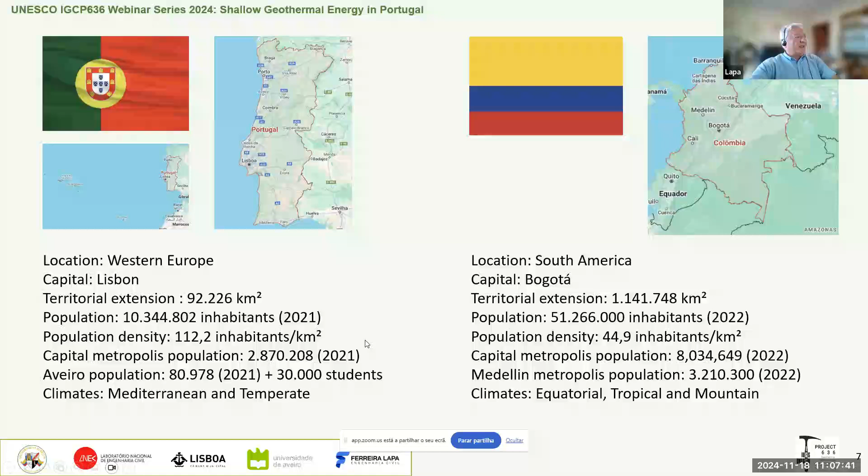So I will make an overview of this technology, which we call shallow geothermal energy systems. I made a collection of information about our two countries, Portugal and Colombia. It's evident that we are different countries, with different climates, different population, and different distribution of population. So the question we can put is whether this technology is useful and usable in different country conditions.

We can make this statement from our experience: despite the multiplicity of social and economic circumstances, different climates, geology, and environment, this technology shows that it can adapt to any of these situations, depending only on its implementation, because of different types of buildings and their energy needs.

This shallow geothermal energy system is so-called very low enthalpy geothermal energy system, because we are in the range of temperatures of the human body, between 0 and 40 degrees Celsius. This technology is for acclimatization of buildings, so air conditioning of individual buildings and also urban complexes, realizing the following guidelines.

The underground, the soil, is a stable and endless source of renewable energy closer to the building. This is important because normally traditional electric power equipment uses energy that is transported from other locations.

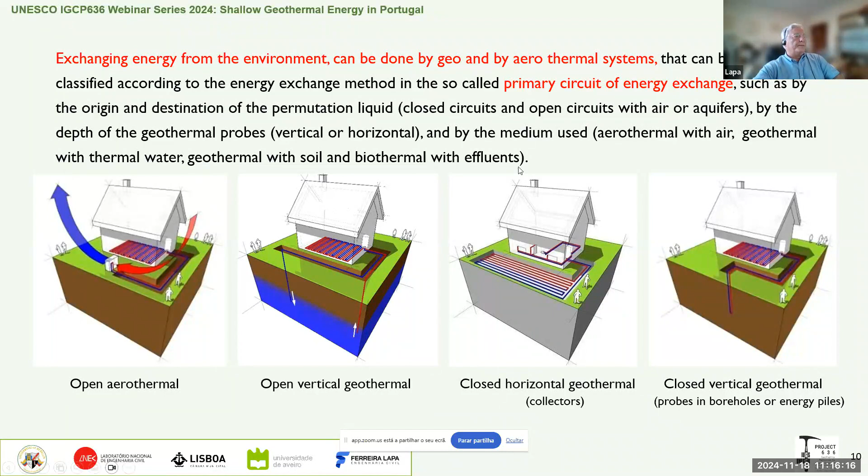So these shallow geothermal systems use the soil as an external exchange medium, but we can use other means to transmit the soil temperature or the water in the soil, in an open loop, or using sewer, for instance. We can transmit this to the inside of the building, and if we have needs of cooling and heating, we can use reversible heat pumps that can transmit not only heat but also cold energy to the interior of buildings.

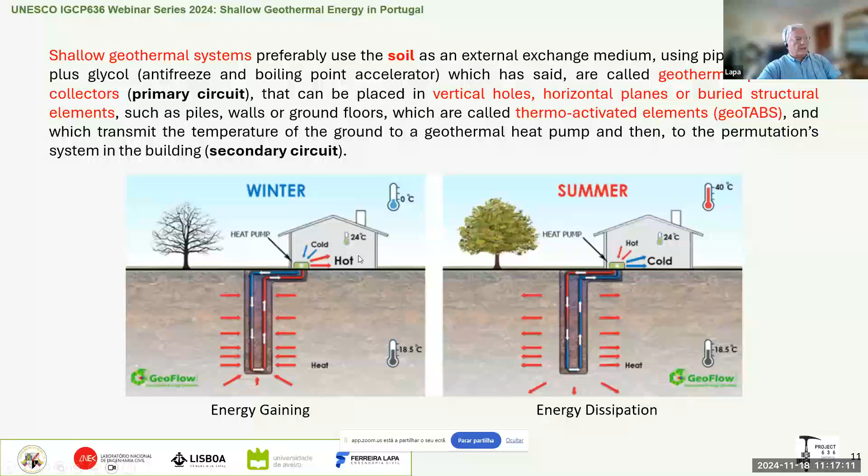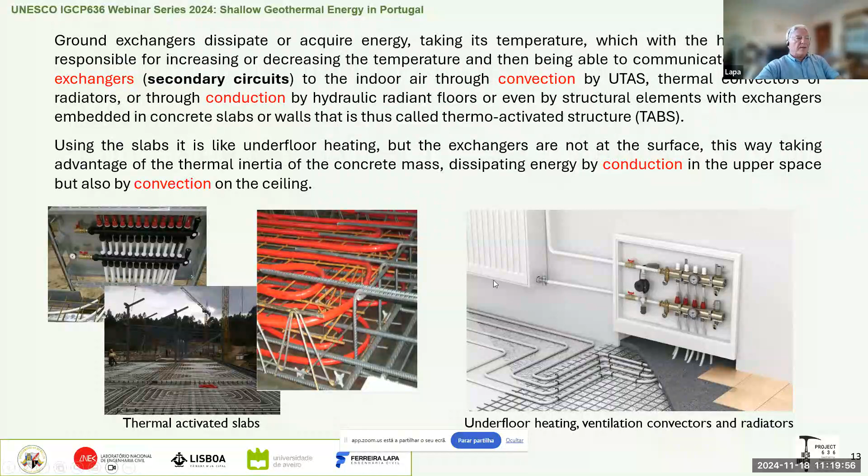The other ways are also conduction or convection by means of hydraulic radiant floors, air handling units, thermal convectors, radiators, and so on. So we use the usual means to transmit this energy from the soil to the building.

Why did the University of Aveiro become interested in this technology? The increase of population in our school between 2011 and the present time doubled in 15 years - we doubled the population. This population includes students, teachers, researchers, employees, postdoctoral researchers, and so on. So the needs for power and energy increased.

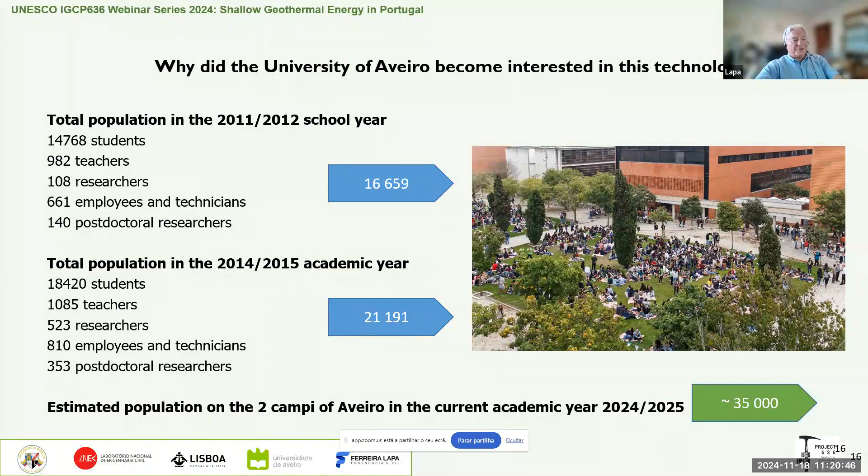This increases the cost of energy at the university. So we were at the time challenged to use different technology than the traditional chillers for cooling and other means for heating. So we searched for solutions and found solutions in Central Europe for heating, but we also visited some buildings in Spain and checked that for cooling, this is also a very suitable technology.

For our three main campuses: Santiago campus has 73 hectares and 49 buildings. The Crasto campus has 19 hectares and some buildings built in this second or secondary campus. The other one is a creative science park, which we call PCI, which has 37 hectares. Altogether, we have about 66 buildings and 25 hectares of built area.

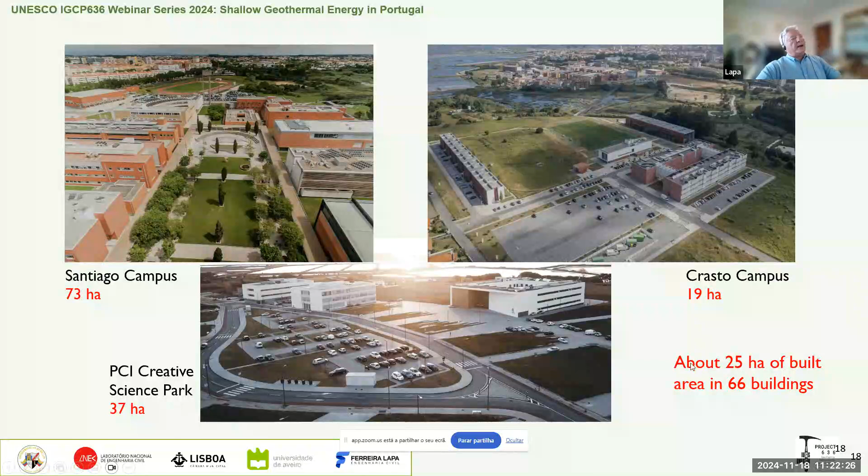So the challenge is reducing the energy demands of the buildings, supplying energy with minimal electric power use to achieve environmentally friendly acclimatization solutions, to achieve investment payback periods shorter than 10 years, and less than 25% of investment in the climatization system compared with currently used electric power and gas-based solutions.

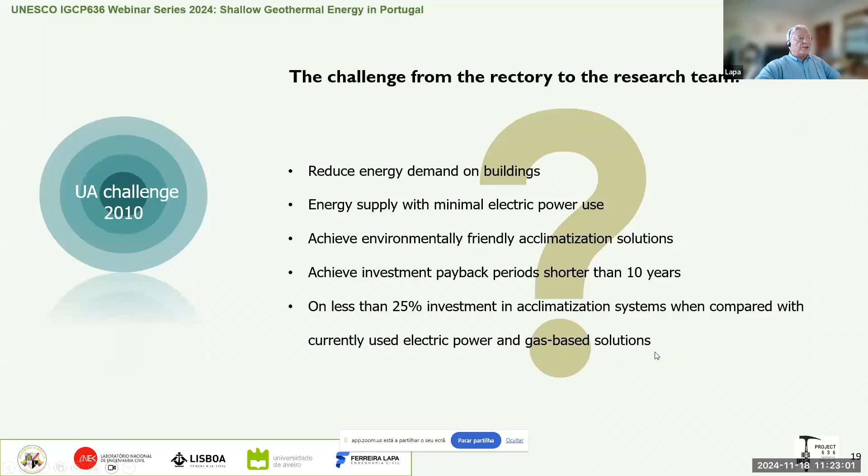What we offer as a solution is to have passive system solutions and concepts to decrease energy demand, and to have geothermal very low enthalpy systems. This technology uses the conductivity of soils, and we need to know where are the best soils and the best way to achieve energy from the soil.

So regarding the conductivity of soils and rocks, we made some research to have realistic values of the ground energy potential - the building and geo exchanger system with water reversible heat pumps, using collectors on boreholes or on energy pile systems, and using sewers as another kind of exchanger for thermal exchange of energy. We call it biothermal energy.

Thermal active building systems with activation of concrete slabs: on the slabs we put probes or exchangers to transmit energy to the mass of the slab concrete, allowing more efficient transmission of energy to the building. We also use phase change materials, PCMs, for heating or cooling energy storage.

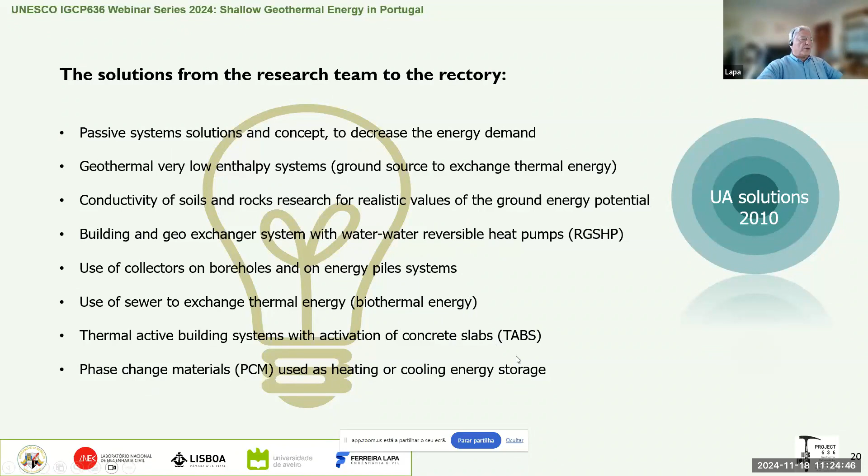This way, we started in 2010 and until the COVID time, until 2020, we built 6 buildings in the university, and through this we gained knowledge to understand the design, to understand how we can put the exchangers, and many things about problems of this technology.

After COVID, we also made some studies and projects for private buildings such as offices, services, hotels, rehabilitation, industry, senior residences, and healthcare buildings. This way we gained knowledge about how to design, how to build, and how to use the different technologies associated with this main technology.

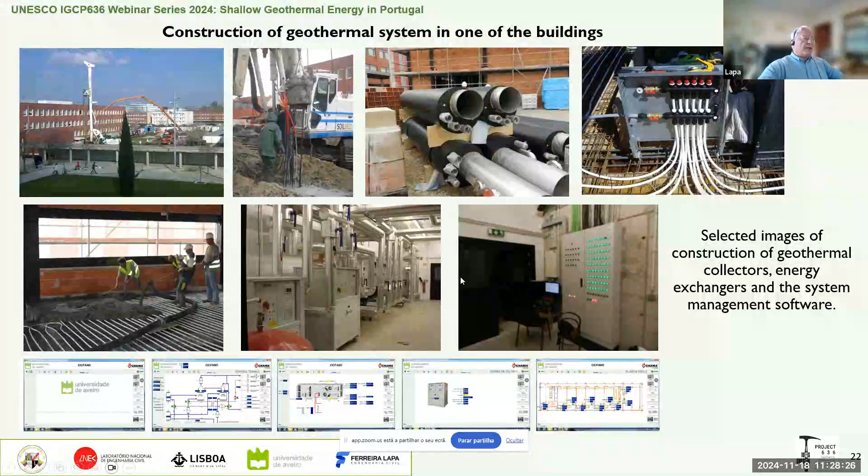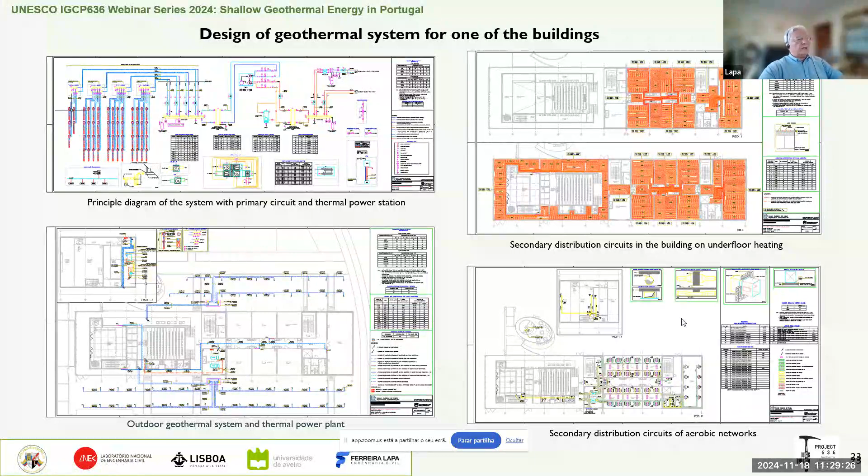So we use geothermal networks also conditioned by this temperature that we change from the soil. Also, we have some instrumentation to collect data, and we have some research on these buildings.

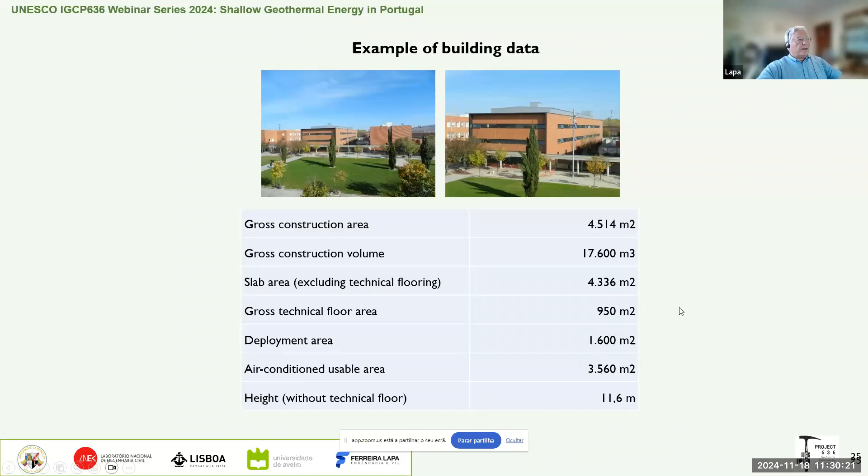These buildings are normally the same type of buildings here in the university. The gross construction area is about 4,500 square meters, the deployment area is about 1,600 square meters, and the air conditioner usable area is about 3,500 square meters. For this building, we estimate the needs at 134 kilowatt hours for heating and 152 kilowatt hours for cooling.

The geothermal and biothermal systems, we have two systems in this building: 55 energy piles of 600 millimeters diameter and 30 piles of 400 millimeters diameter. We also use a biothermal system with one stainless steel exchanger of 350 millimeters diameter with three exchangers, which gives 3 by 32 meter long exchangers. The installed power of these two systems: the first one, from the soil, gives 100 kilowatt hours in heating and 90 kilowatt hours in cooling.

So the cooling is not covered by this one, and we need the second system to cover the needs. We also use this TABS solution, thermally activated building system, with two geothermal heat pumps, two buffer tanks to compensate the system and use it as domestic hot water, 10 circulation pumps, and heat exchangers in prefabricated lightweight slabs of honeycomb panels.

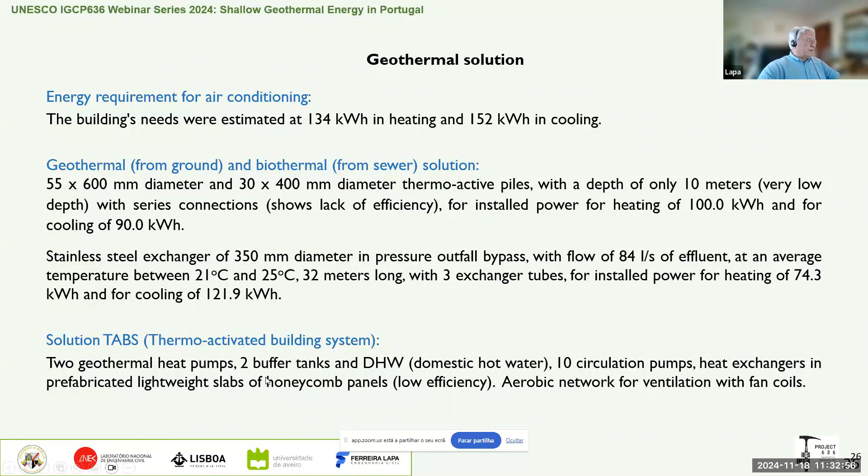Because we put the exchangers on the top surface of the slabs, it revealed very low efficiency. So for this TABS solution, we need a more complete concrete solution, such as concrete slabs.

Some financial evaluation of the system: we present this solution within the limits of the university, namely 25% of investment, limited also by the cost of maintenance and energy cost. So we compare our data from the energy consumption during 7 years with what we would consume if the solution were the traditional one, with electric energy and natural gas. The investment cost is a little bit more than the traditional one.

It's around 6 or 7% more, but the annual maintenance is 3 times less, and the annual energy cost is also 3 times less. So in almost 7 years, we have paid off the investment. The payback period is around 7 years.

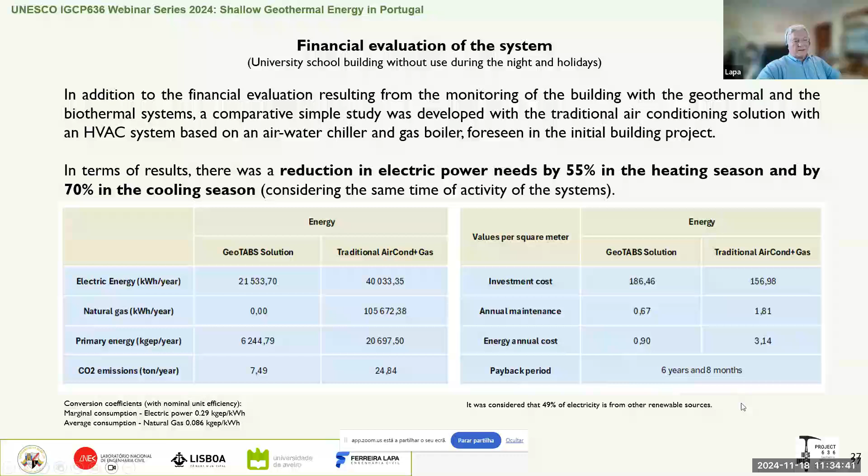So really, from this building and others, we can summarize: the initial investment is around 3 or 4 times, or more, 7% more than the investment in the traditional system, but we can gain 55% in energy consumption for heating and almost 70% reduction in energy consumption for cooling.

So the expectation for residential and services buildings, not single family residential buildings, is about 7 years payback.

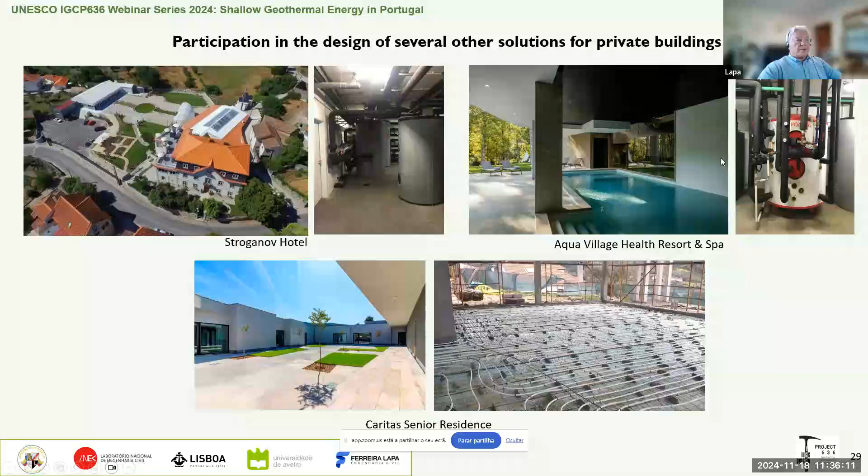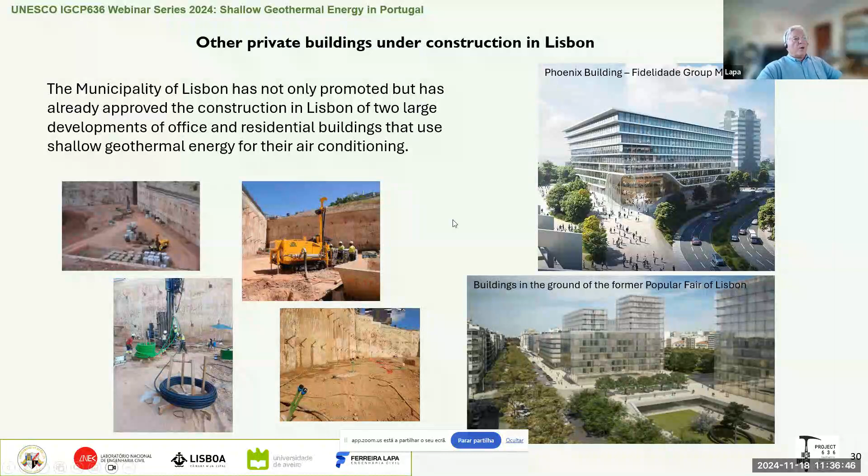There are many other buildings with this technology. We can show you some hotels, resorts and spas, some senior residences, and a big complex in Lisbon made by this insurance group, Fidelidade, which is around 45,000 square meters of construction. And here we have 4 buildings of more or less 90,000 square meters, all with this kind of technology.

We can also use this in urban complexes. For instance, this tourist development in the south of Portugal, which we call the Algarve. Probably you know these places. And also in industrial equipment.

For instance, this facility, which is only a cooling system for industrial equipment. They have another kind of solution, and this is the recording of that system. It's an air-to-water chiller, and the power consumption of that solution is about 400 kilowatts per hour.

With the geothermal system, we see a significant reduction to 67 kilowatts per hour. So the financial return, or payback period, was around 2 years.

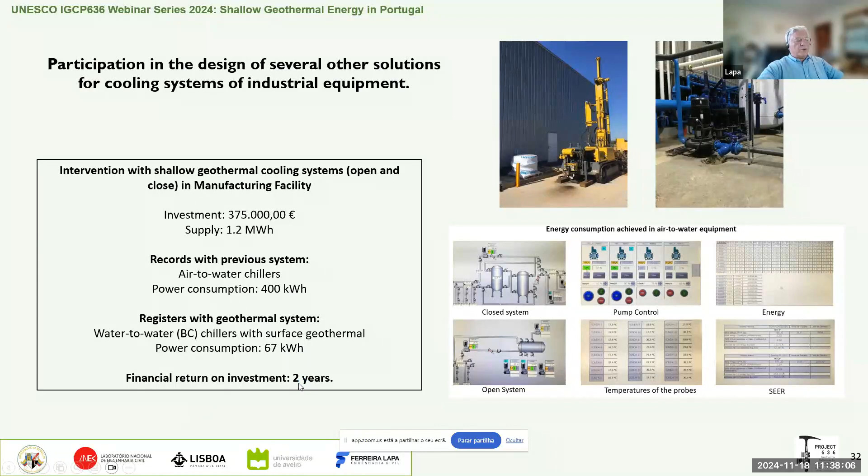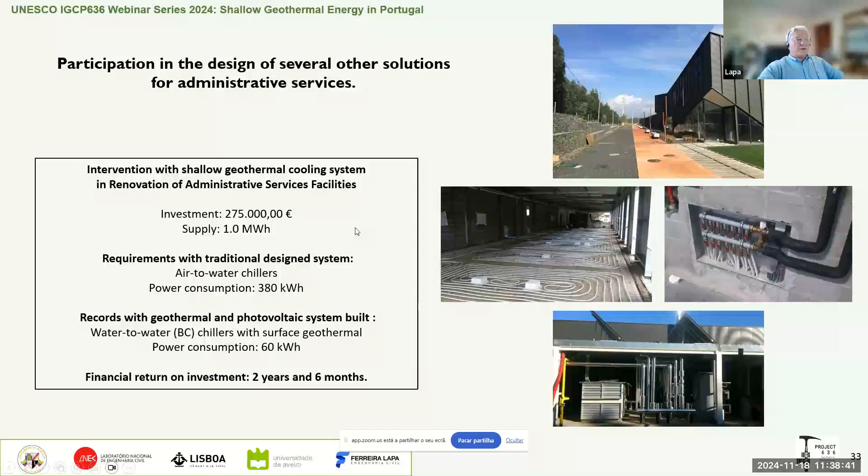About the future, this solution can be constructed together with others, namely solar panels, another kind of solution such as wind, cooling towers, and so on. So we can use this technology together with other renewable energies coming from the air, the water, or the sun.

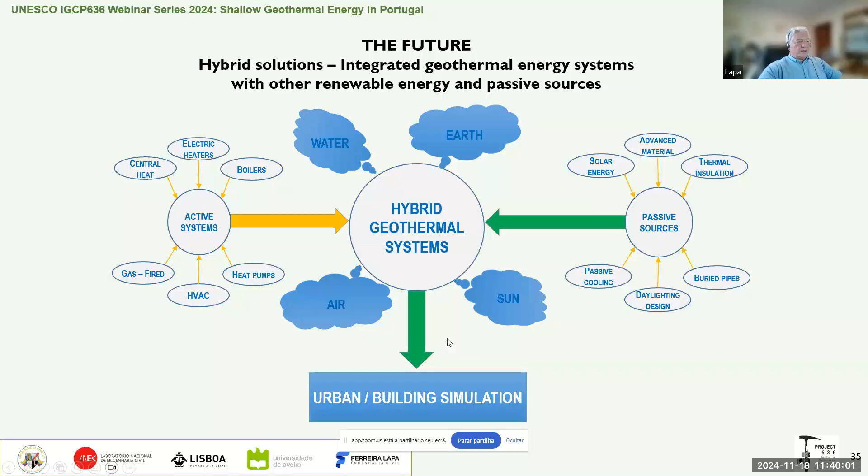And together with passive sources of solar energy, advanced materials like PCMs, thermal insulation, buried pipes, daylighting design, and passive cooling, with these passive sources combined with active systems, I think we can have very good, efficient, and sustainable energy for buildings and urban complexes. Well, thank you very much.

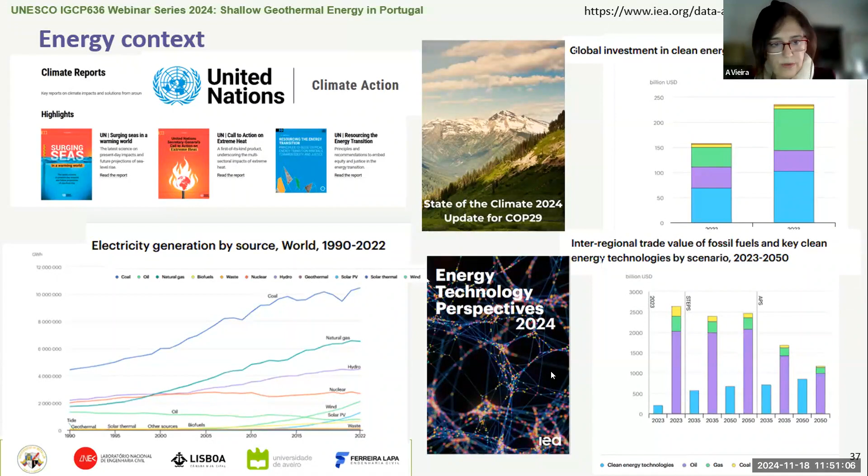So, what is the role of shallow geothermal energy in environmental protection? I believe Lapa already gave a very good overview with the Aveiro case, and not only, but as I mentioned before, the CO2 emissions from burning fuels are one of the greatest challenges of our century. And we are looking for renewable energy solutions in order to mitigate climate change.

Shallow geothermal energy emerges as a very promising alternative, and it's becoming, as I said before, more and more used, as it uses a cleaner renewable energy source. It's not an infinite source, but it is direct and easy to use. We need to adapt and use it in a more current way. So here is a picture, not only of shallow geothermal systems.

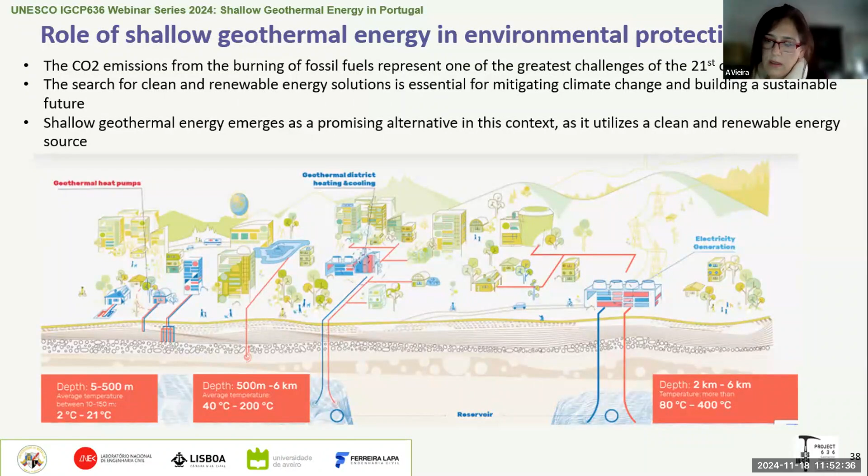In shallow geothermal systems, I have to say that we are not producing energy. We are using directly the thermal energy from the shallow soil layers in order to heat buildings, to cool buildings, or to store thermal energy, among other applications, but these are the most frequent.

I took also this fact sheet from a European research project called MUSE, and this fact sheet gives, in a very condensed form, a lot of numbers and information about the forms in which shallow geothermal energy can be used, as I said, in thermal storage. It can be used in vertical or horizontal borehole exchangers, and in foundations, piles, slabs, retaining walls. These are usually called thermoactive geostructures.

Another promising way is to use the excess heat from industry and store this energy in order to heat spaces in buildings, but not only for heating, also for domestic waters, for instance. And if it is used in a very systematic and current way, of course the savings in energy and the reduction in CO2 emissions can be very, very interesting.

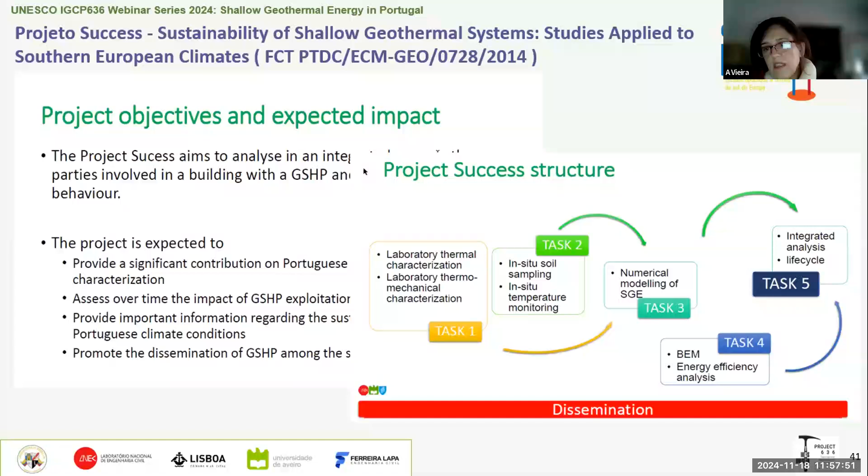So here is the structure of the project. It was divided into 5 tasks: lab characterization, in situ soil sampling, numerical modeling of the system, integrated life cycle analysis, and energy efficiency analysis.

Later on we gained a lot of expertise. We made a lot of thermal tests to characterize the soils, Aveiro soils, in terms of thermal conductivity, heat capacity, etc. We have monitored the soil - there is a monitoring system that is still working. We measure the impact of the exploitation of the shallow geothermal system.

Based on all this experience, we invited Lisbon municipality to join us in another project, and we got their agreement and funding. That is the GeoSustain project, which is still running. The title is: Sustainability Assessment of Shallow Geothermal Systems for Lisbon, Characterization Studies of the City Soil's Thermal and Thermomechanical Behavior.

At the moment, as Raj will show in the last presentation of this webinar, he'll provide more information on the soil tests we are carrying out in Lisbon. There was no information about the thermal properties of the soils in Lisbon, and Lisbon is a very interesting and very complex city in terms of geology. We are trying to give some information and development on this topic to provide the city with thermal mapping and zonation, in order to facilitate the use, now and in the future, of geothermal systems.

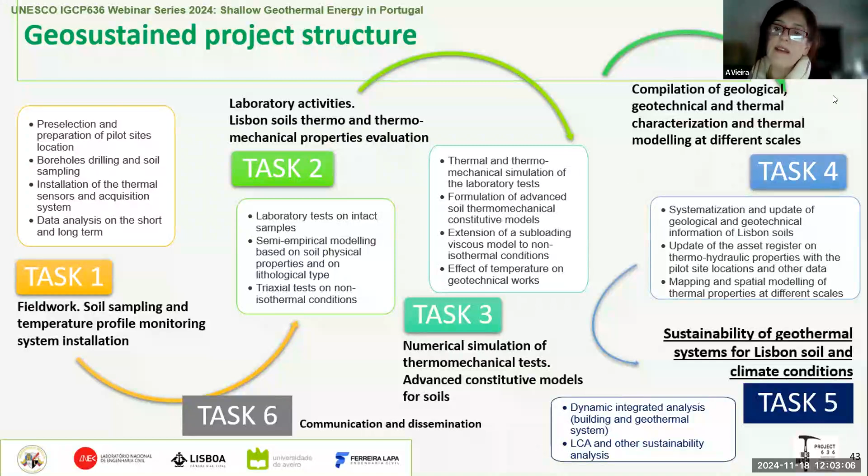We had already 3 public events of the GeoSustain project, and we will have a 4th at the end of the project. Of course, we are aligned with the United Nations Sustainable Development Goals, namely Goal 7: ensure access to affordable, reliable, sustainable and modern energy for all.

Goal 9: build resilient infrastructure, promote inclusive and sustainable industrialization and foster innovation. And also Goal 13: take urgent action to combat climate change and its impacts. This is our team, and now I'm going to move to another project involving foreign institutions. Recently, we had a project with Aveiro University and LNEC, in partnership with the University of Stavanger.

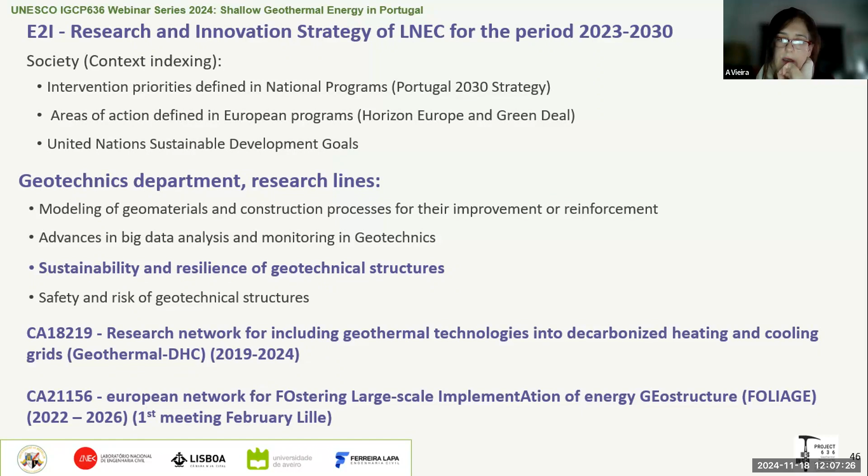There is another action that is still running, involving around 27 countries. The title is the European Network for Fostering Large-Scale Implementation of Energy Geostructures, acronym FOLIAGE. We are around the midterm of the project, which will end in 2026. Now, very briefly, some results.

We have been working for some years on thermal characterization. We made thermal tests using different sensors on samples retrieved from different locations and at different depths. The study of thermal conductivity is crucial for sustainable and well-designed shallow geothermal energy systems. From one formation to another, thermal conductivity can vary significantly, so it's important to assess this parameter properly.

We have also carried out 2D and 3D models to complement the studies in the lab. We have tested and numerically reproduced a lot of tests and analyzed the effects of several parameters, for instance the duration of a thermal test - how much time it should take to get good results - and the importance of the conductance and resistance between the needle, the recipient and the soil. There are a lot of things that affect thermal conductivity measurements in the lab.

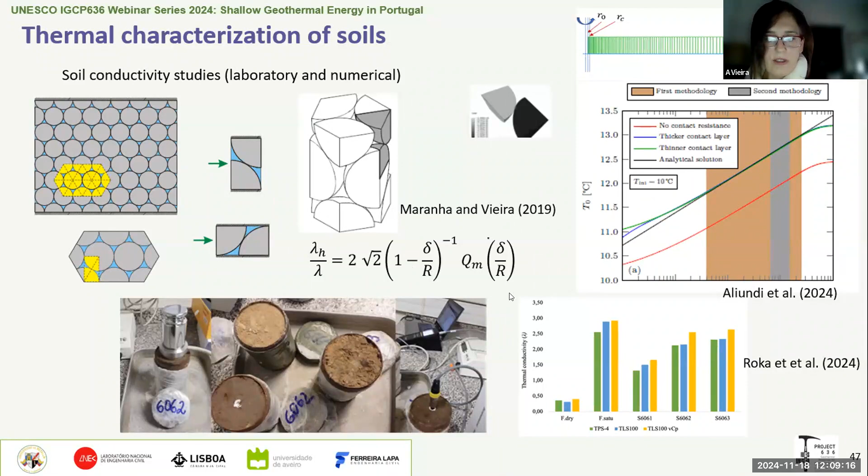At the moment, as I said more than once before, we are complementing this information with thermal tests at different depths, not only at the surface. More important than the surface is the thermal conductivity in depth, in order to design the systems. So we are carrying out multi-scale thermal characterization.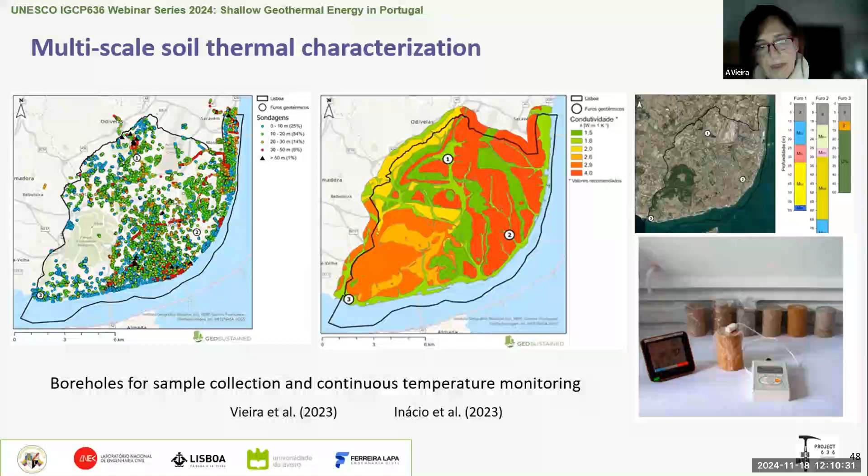We are also using the database available from the city council, with boreholes shown as this huge amount of dots, and we are crossing this geotechnical information to give some perspective and estimate of the soil thermal properties.

Thermomechanical tests, as I told you - we have an automated triaxial environmental system. Very briefly, we study the effect of temperature on the deformability and strength of soils in order to accurately predict the performance of infrastructures in the future, and how, for instance, heat waves could affect the performance of the systems.

Also, here are some pictures of the results of the implementation of thermomechanical models, being produced mainly by two colleagues of the Geotechnical Department who are really experts in implementing advanced constitutive soil models.

Here are some pictures of the numerical models. We have to characterize the ground properly and the building in order to have a good estimate of the energy exchange and the impact of the geothermal systems, both in the short and long term. A lot of things have to be integrated into this analysis.

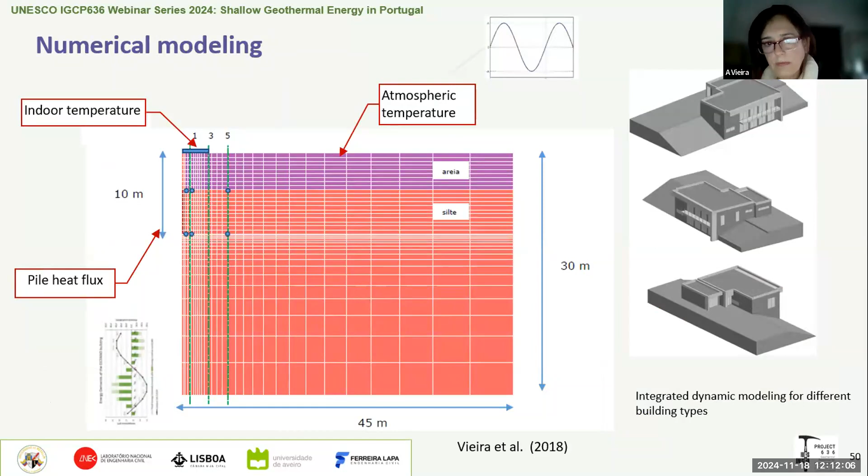This is a picture from a very recent PhD thesis completed as part of the project. The case study is the Aveiro University building, used as a prototype. The building was modeled with EnergyPlus software, and the ground was also modeled. All the energy exchanges were modeled based on the climate, the soil conditions, and the energy needs of the building, giving us a lot of outputs and sustainability indicators.

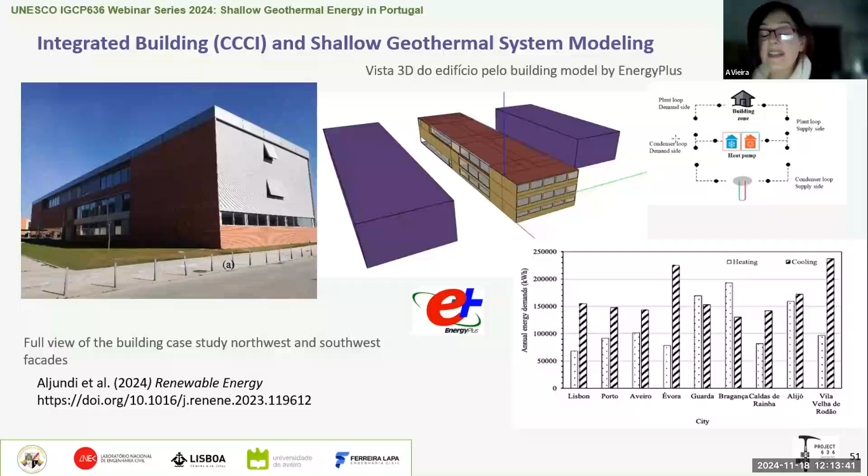First, we used local temperature data from Aveiro City. Then we made extrapolations, supposing the building was constructed in other Portuguese cities like Lisbon or Porto. So the impact of the shallow geothermal energy system under these different climate conditions was also studied. A lot of things were done, but much more remains to be done in this topic of integrated analysis.

Here I show some results from the same building. A lot of sensors are placed in different boreholes, temperature sensors, and temperature is being monitored in order to assess the influence of the exploitation of the geothermal system. Does the geothermal system impact the temperature field over time? Is this impact important?

In the long term, it is possible to assess this. We have around 4 years of monitoring, so it's not much, but we'll have more. There is a huge amount of data, and with it we can try to understand the impact of the exploitation of the geothermal system, taking into account also the influence of the variation of atmospheric temperature.

With this 4-year data we have made some analysis. We are still treating the data, because the temperature increased, but the atmospheric temperature also increased. So we are trying to correlate the effects of all these factors interacting together.

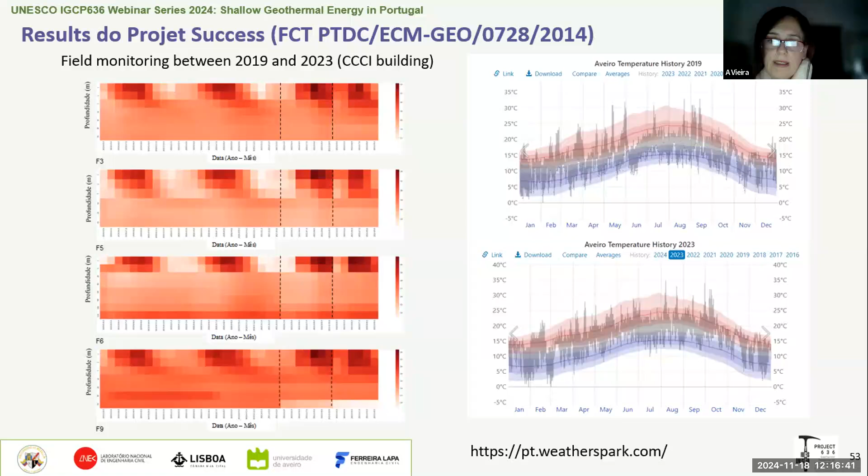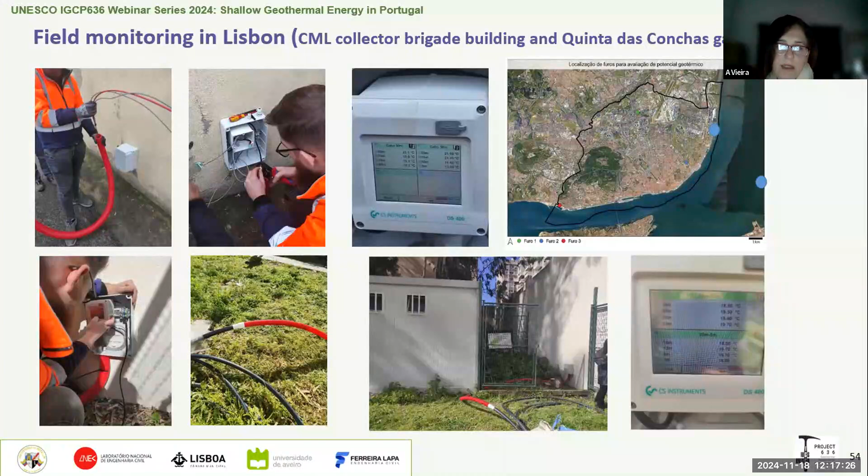So the data is still very short, 4 years, but in the coming years, with proper machine learning and other artificial intelligence techniques, maybe we'll be able to understand more of what is going on. In Lisbon, we are also measuring temperatures in depth, and here are some pictures of the installation of the system. On the right is the map of Lisbon, where we have around half a year of temperature monitoring to 80 meters depth. This is also the first time we have continuous temperature monitoring in Lisbon to such high depths. I believe this is the last slide.

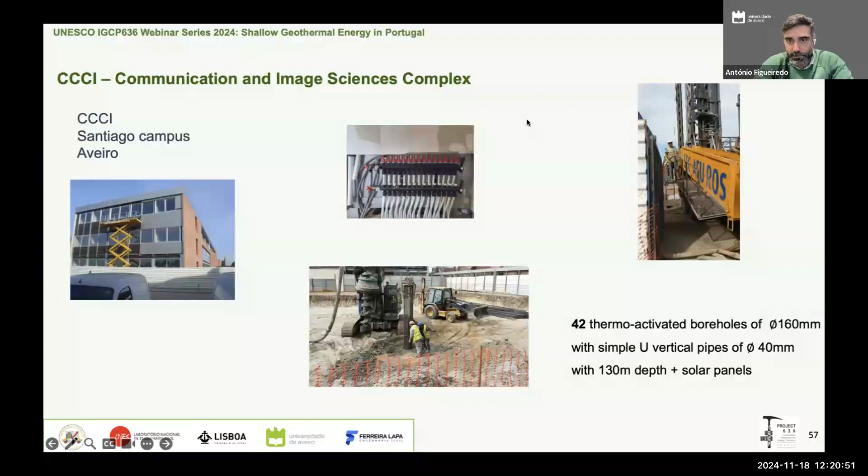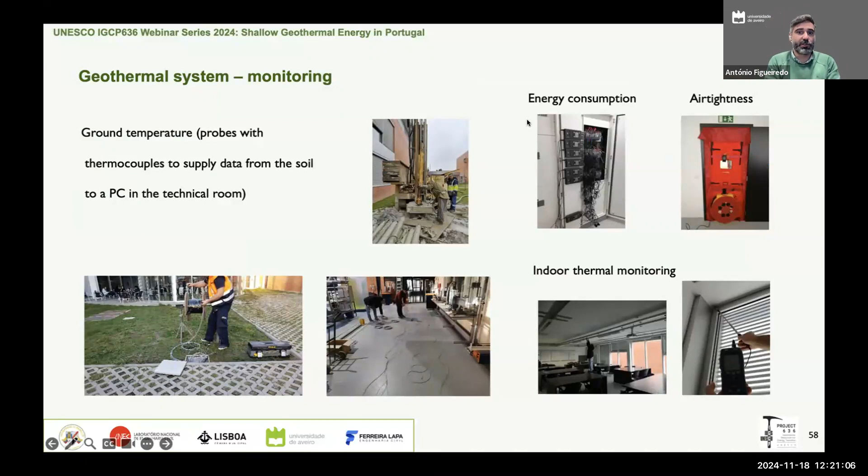Regarding the monitoring, this presentation is divided into 2 main points. The first corresponds to the monitoring of the exterior part of the building, and the second corresponds to the interior part of the building.

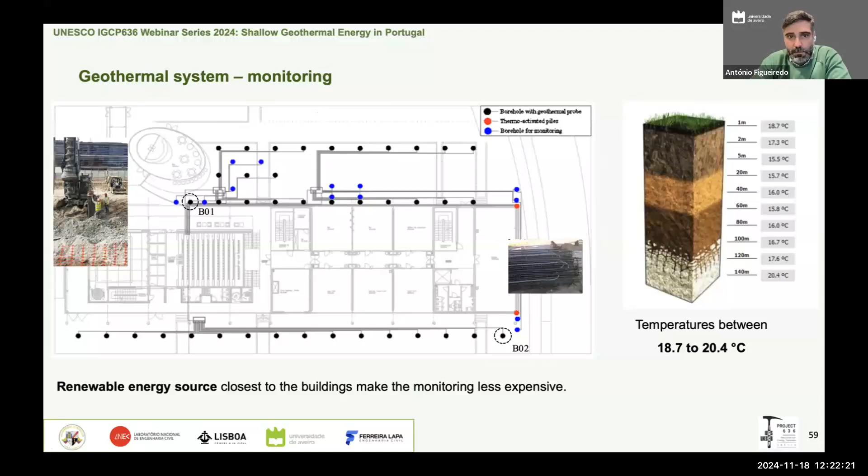Now moving on to the monitoring of the interior part of the building. Three main characteristics were measured and monitored: power and energy to obtain the internal loads of the building. This is paramount as input for the building energy modeling and also for validation purposes. Temperature was measured with portable data loggers. All the thermal zones were monitored with several points.

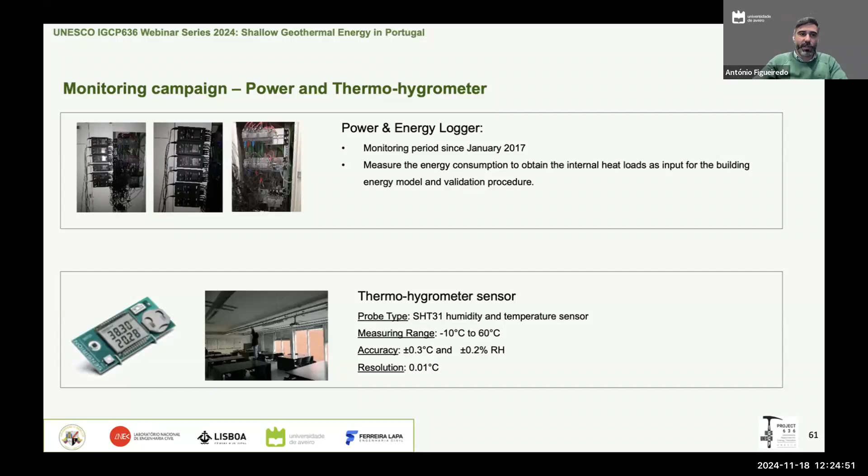The power and energy was also measured, not for as long, but during almost 3 months. In terms of air leakage, this is the third parameter that we tested extensively, because the air leakage of the building has a high impact on the thermal and energy consumption. To perform these tests, blower door tests were used individually in specific rooms to check the air permeability of the windows and frames, and also an overall test on the whole building was performed using two blower door equipments to measure the entire building during one test.

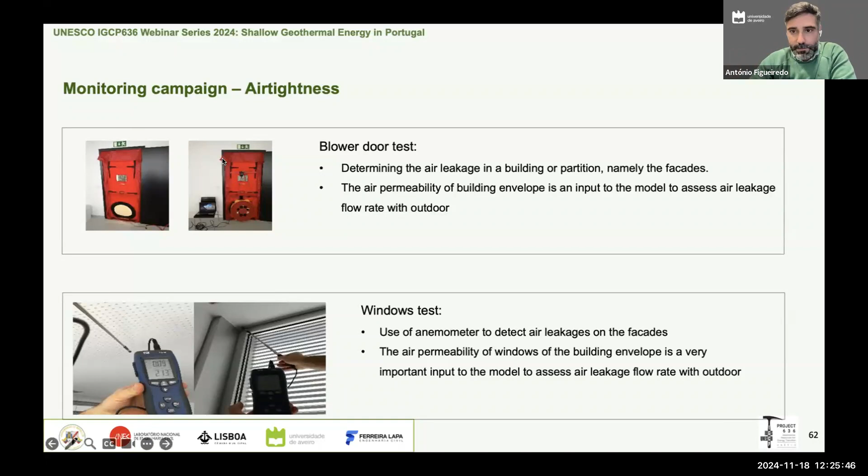In terms of energy consumption, the auditorium stands out as the thermal zone with the highest consumption in the building. This is because this specific thermal zone has high ceilings, and this zone has really huge dynamic behavior in terms of occupation.

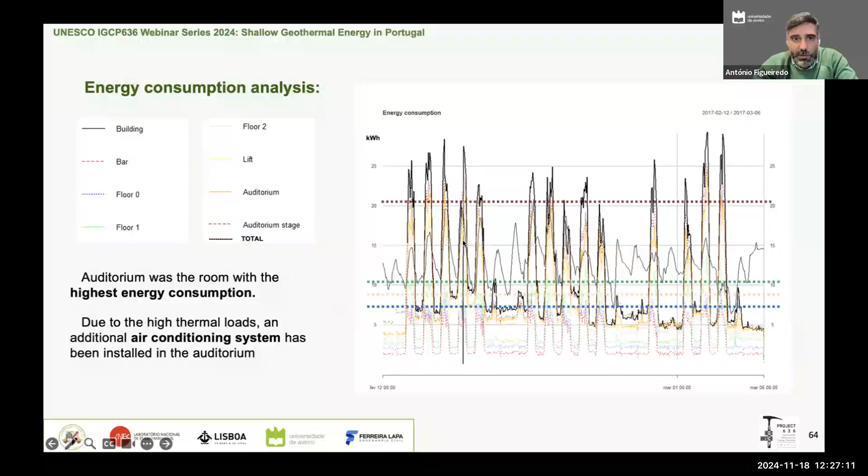Moving on to the second part of this presentation, in which I will focus on dynamic simulation issues. I would like to start by pointing out the need for numerical model calibrations, because currently we are designing our buildings using steady state methods that don't reproduce the real behavior of the building.

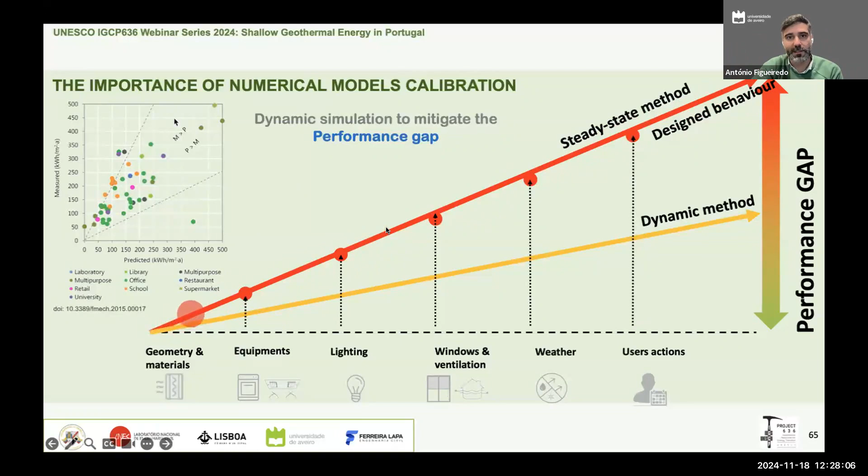Using steady state methods, there are a lot of uncertainties in our models regarding geometry, the materials, the equipment, the lighting, the windows, the ventilation, and especially the user actions. The users have a huge influence on the performance of the building. So we have all the facilities, all the computers, we have all the ingredients to go further to dynamic methods.

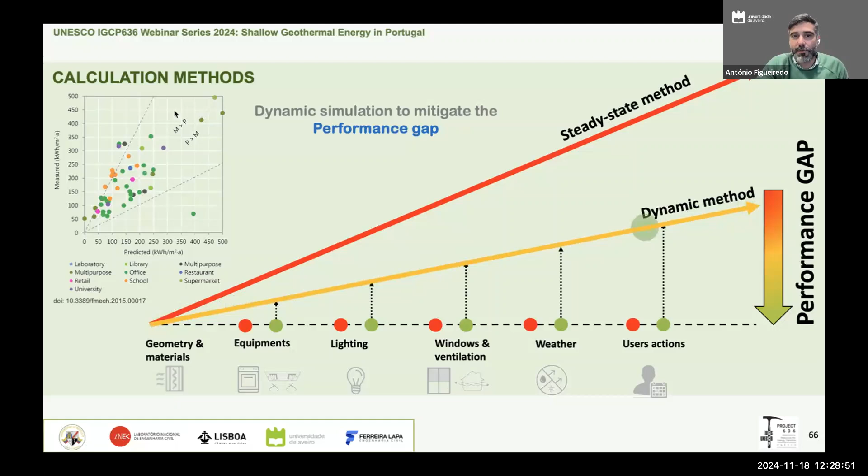With a dynamic approach, it is possible to reduce the uncertainty regarding all these parameters that have a huge influence on the performance of the building. We could create specific schedules for user actions to reduce the problem of the steady state methods. And if we want, it is possible to go further because we already have all the tools to easily develop an optimization process to reduce our level of uncertainties as much as possible, to design solutions that are really accurate with the real behavior of the buildings.

In an optimization process, we could instruct our software, in this case the EnergyPlus software was used. We could create a routine to instruct the software to give us the best results by changing, for example, predefined parameters. In this specific case, we use an evolutionary algorithm to instruct the EnergyPlus, and finally MATLAB to get the best results, which we call the Pareto front.

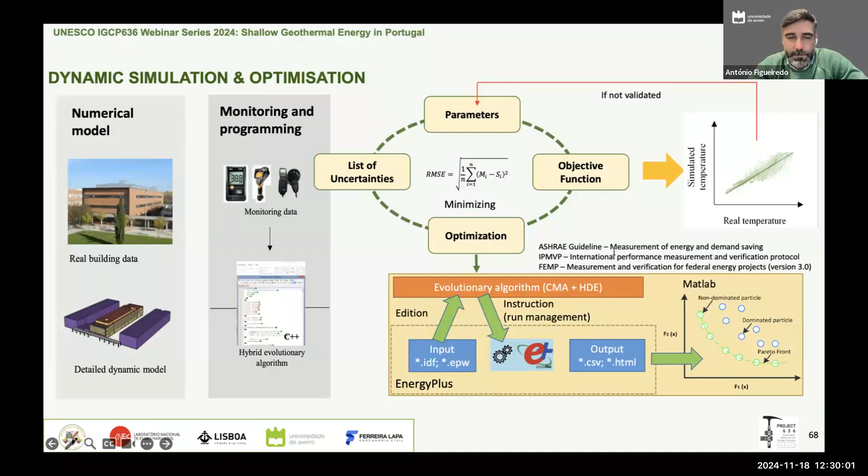Now moving on to the case study, and I start by asking a question: how to improve the ground heat exchanger efficiency. In this case, of course, we use dynamic simulation.

The model was first calibrated using real data. Then the performance of the building was evaluated by changing predefined parameters of the geothermal system. And then an evaluation was performed in terms of energy and in terms of thermal comfort by changing all of these parameters.

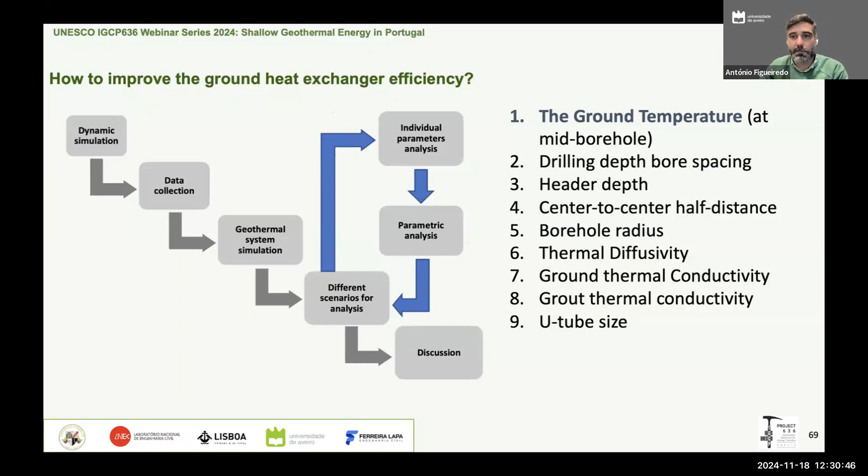In terms of goals, there are two main goals. The first one is to attain improved performance of the building by characterizing each parameter individually, and then to attain improved performance of the building by combining different parameters through the development of a parametric combination.

Regarding the methodology, the building geometry was defined with the SketchUp software, and then some main properties, such as thermal properties of the walls, U value, the slabs, the glazing, the G value of the glazing, the occupancy, the schedules, were defined in Open Studio, and finally the simulations were carried out in Energy Plus.

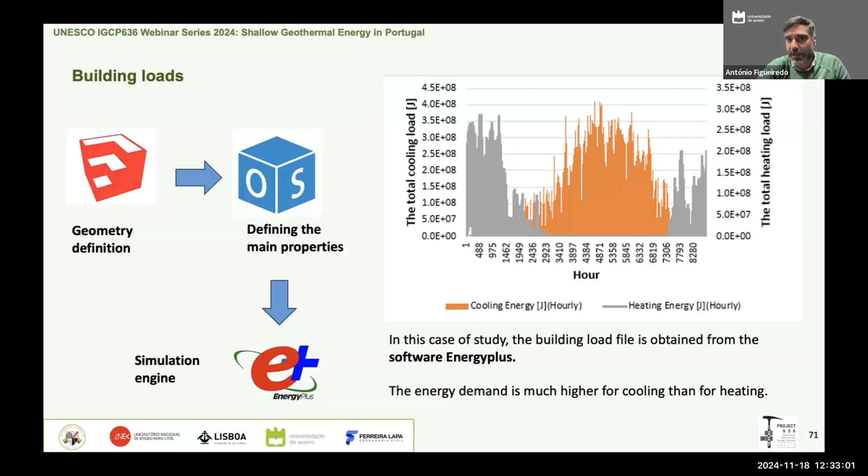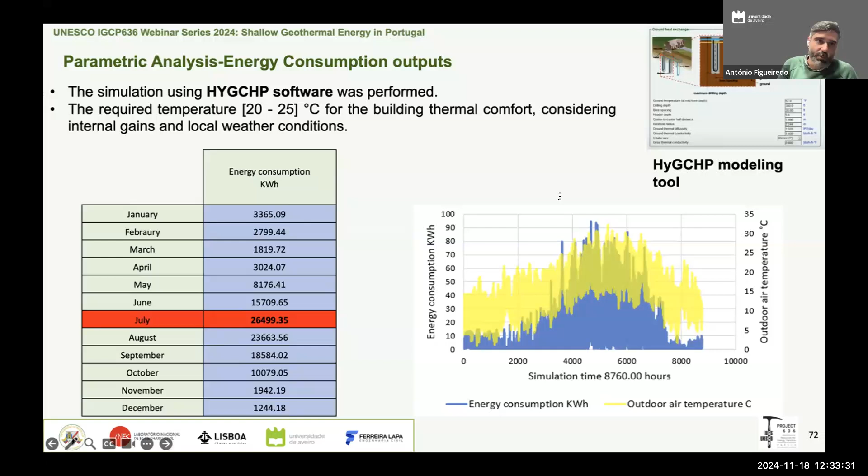After we simulated building needs, we moved on to the design of the geothermal system characteristics. In this case, we used the software HyGCHP to simulate and test all the parameters regarding the system, the boreholes, and the heating pumps. Everything was simulated in this software.

Moving on to the results, as an example, for this building, the increase in temperature leads to an increase in the total energy consumption. When I spoke about temperature, I meant the temperature in the middle part of the boreholes, representing an average of all the depths that we monitored.

Another example, in this case, we considered the borehole radius. A similar behavior was observed: with the borehole radius increase, the energy consumption of the whole system was also increased.

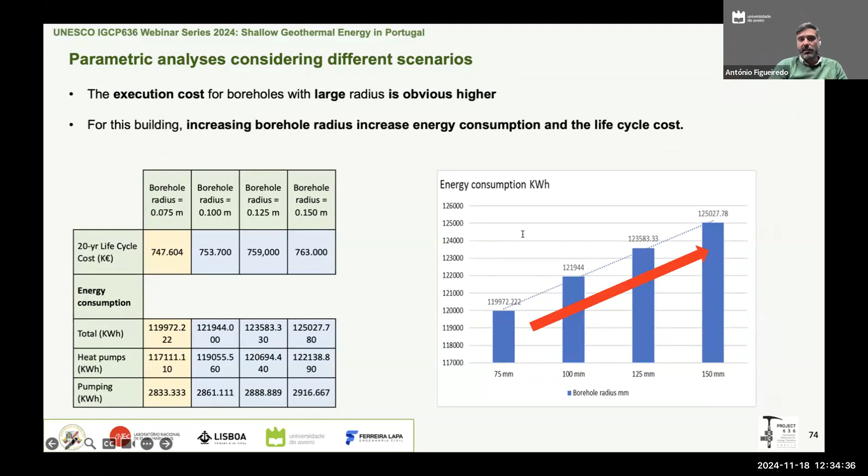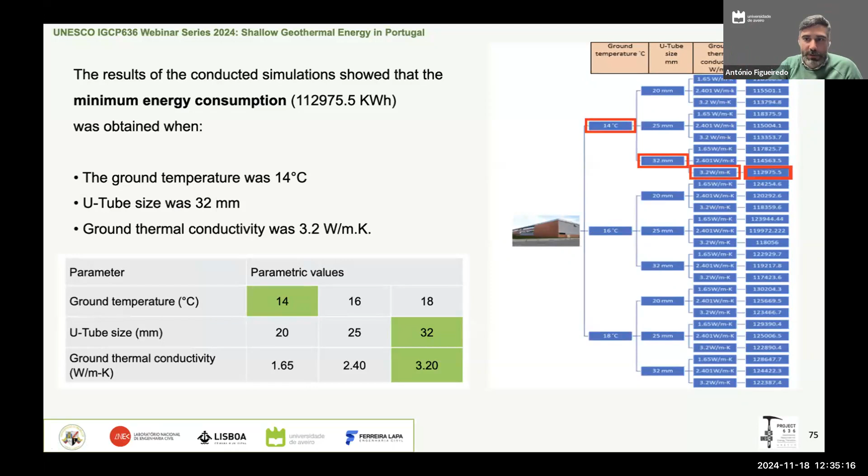In the parametric analysis, three parameters were changed simultaneously: the ground temperature, the U-tube size, and the ground thermal conductivity. The results show that for minimum energy consumption, the ground temperature should be 14 degrees, the best U-tube size is 32 millimeters, and the ground thermal conductivity should be at the maximum value possible, 3.2 watts per meter per degree.

Just some final remarks about this work: energy consumption decreases when the borehole radius decreases and when the ground temperature decreases, but energy consumption also decreases when the ground thermal conductivity increases, including the grout thermal conductivity. Dynamic simulations proved to be a needed tool for accurate system design, and the use of geothermal systems as a renewable and sustainable energy technology should be incentivized to make buildings more energy efficient and environmentally friendly.

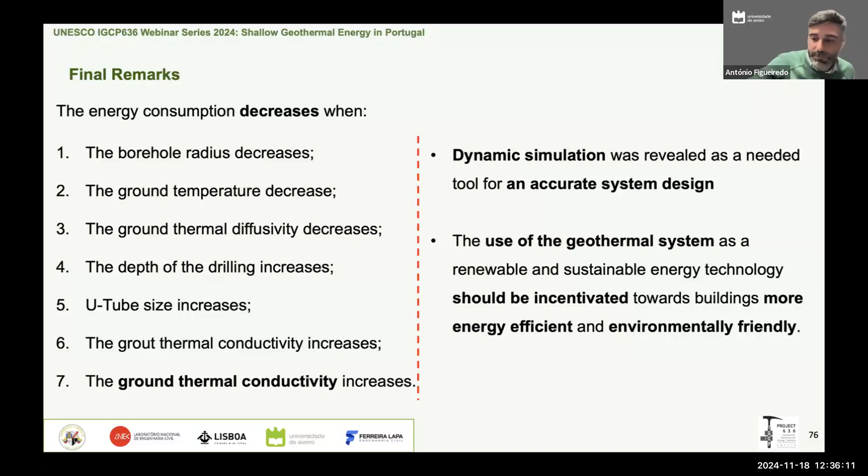Well, thank you, and I give the word to my colleague.

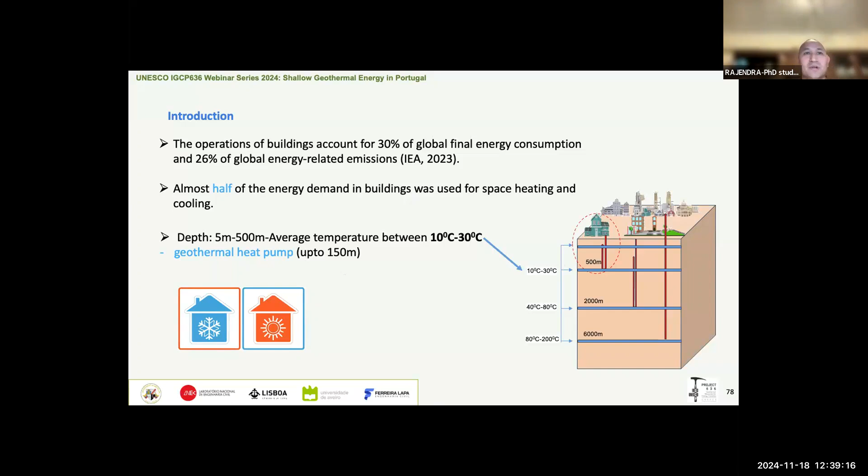The operation of buildings accounts for around 30% of global final energy consumption and around 26% of global energy-related emissions. Almost half of the energy demand in buildings is for space heating and cooling. To mitigate these problems, we can use geothermal energy. In our case, we go up to 150 meters deep to retrieve heat energy of about 10 to 30 degrees centigrade.

For my thesis, I have two objectives. The first is to characterize the thermal properties of soil in the Aveiro and Lisbon regions of Portugal, involving assessment of the physical, mineralogical, and thermal parameters of various soil samples. The second is to evaluate and enhance building energy efficiency using shallow geothermal systems, achieved through detailed multi-scale modeling that integrates shallow geothermal systems into building energy simulation.

These are two distinct regions of Portugal, which are climatically and geographically distinct, and they have different soil types as well. Moving on, I will do a whole building energy simulation of the CCCI building, used as a calibration model since this building is already equipped with a shallow geothermal system. Then I will do a whole campus building simulation using the shallow geothermal system at the urban scale.

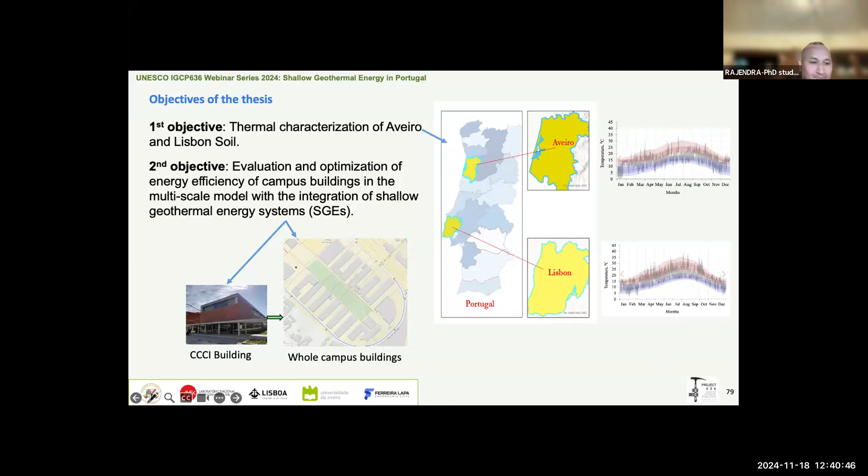Despite the advantages of shallow geothermal energy, its widespread dissemination faces several challenges, including limited understanding of subsurface thermal properties, high initial investment cost, legislation, land use, land occupation, public governance, and subsurface structures. My research focuses on addressing one of the dominant barriers by providing detailed soil thermal characterization and demonstrating the benefits of integrating geothermal systems into building energy design.

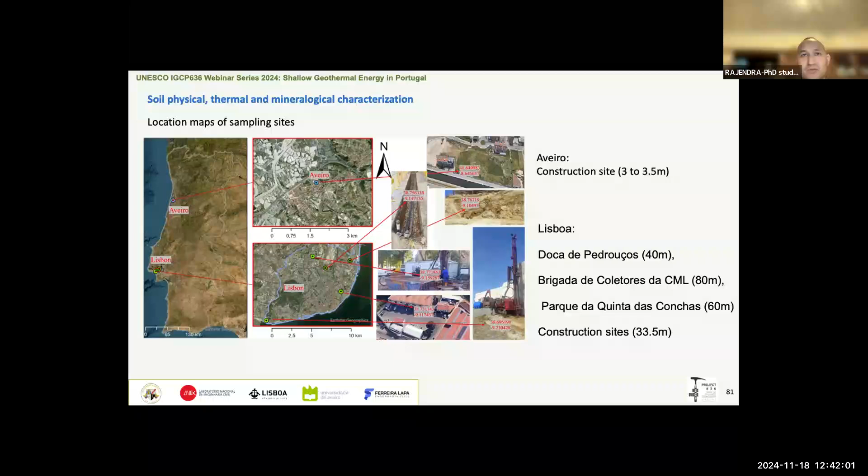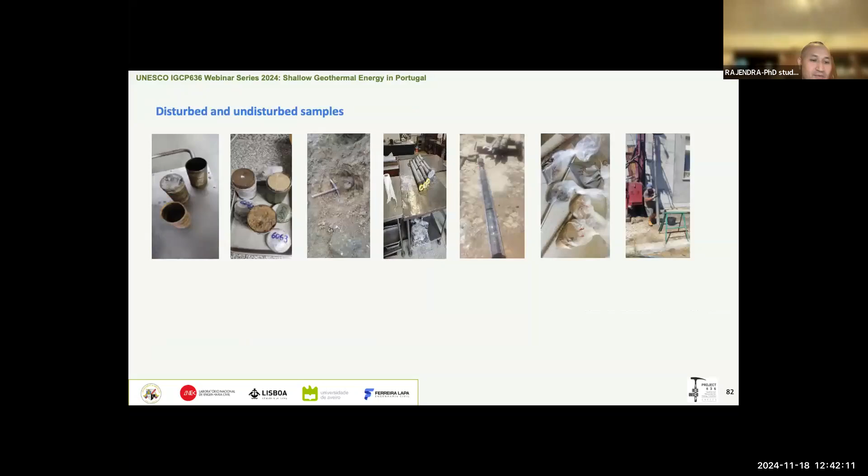This slide shows the locations where we collected soil samples in Lisbon. We chose three sites where we drilled three boreholes up to 80 meters, at two construction sites. In Aveiro, we chose one construction site and retrieved samples up to 3 to 3.5 meters. Here are some glimpses of disturbed and undisturbed samples retrieved from the sampling locations.

In Lisbon, as part of the GeoSustain project, we used the drill rig FD 1200 SD NCB with a drilling capacity of 104 kilowatts, and a sampler with a length of 1.9 meters and a diameter of 68 mm.

To retrieve the sample from Aveiro, we use the metallic tube of length 140 mm and diameter of 70 mm.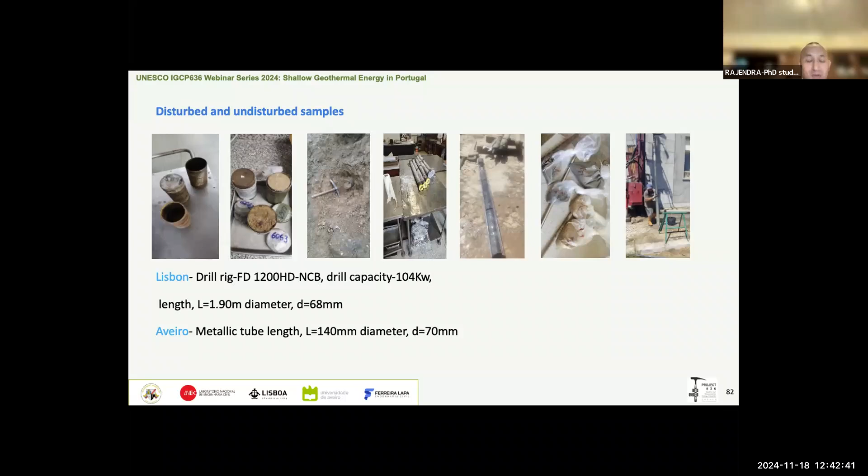For this purpose, we conducted several tests to assess the soil physical characteristics on the collected soil samples, including grain size distribution, particle density, water content, void ratio, and degree of saturation. These tests helped classify the soil and provide a basis for understanding its behavior. Knowing the physical properties is essential for predicting how the soil will respond to thermal changes, which is critical for the design of geothermal systems.

Here are some glimpses of the tested samples. As we can see, the different soils from Aveiro and Lisbon are different in appearances, and they have different physical and mineralogical properties as well.

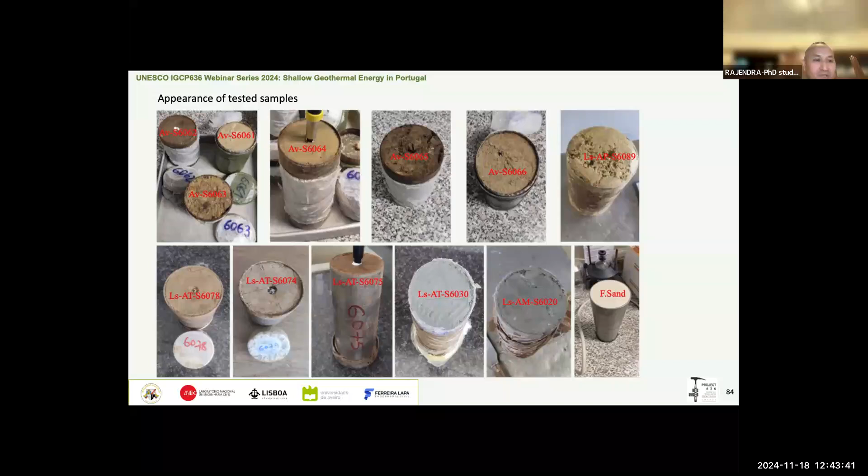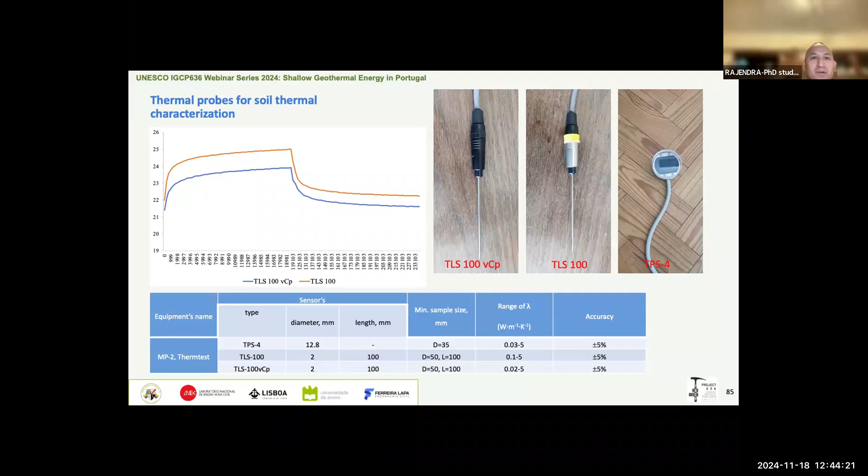Here are the thermal probes that we use for the thermal characterization of the soil samples. We use three thermal probes: two are the transient line source, and one is the transient plane source. The first one, TLS 100 VCP, can measure thermal conductivity, thermal diffusivity, and volumetric heat capacity simultaneously. In the table we have different properties of the thermal probes.

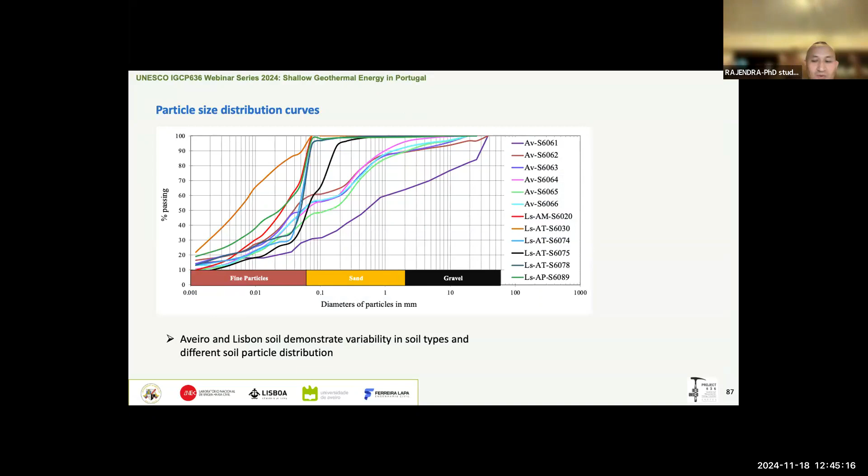So here we developed the particle size distribution curve, which demonstrates the variability of the soil types in Aveiro and Lisbon, and that is very important to analyze its effect on the soil thermal characteristics.

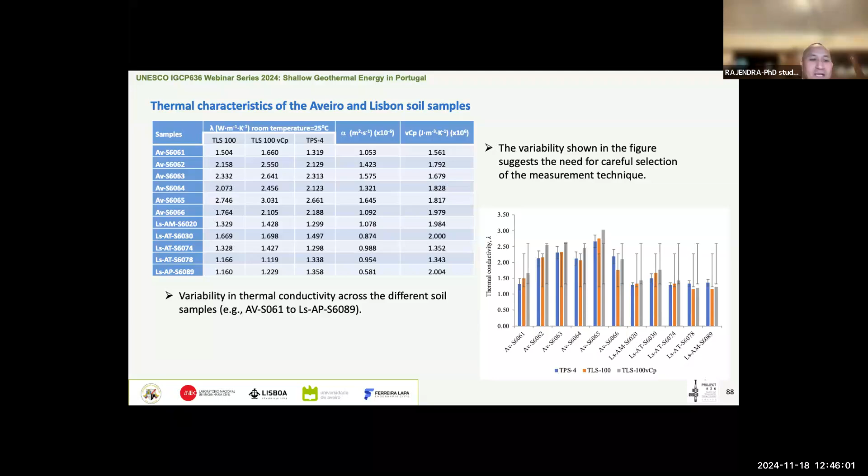Here is the result of the thermal characterization with the three thermal probes. We see here the Aveiro soils have consistently higher thermal conductivity values than the Lisbon soils. The transient plane source also gives lesser values than the other two thermal probes. So the result indicates significant variability, highlighting the importance of selecting appropriate measurement techniques and understanding local soil characteristics when designing the geothermal system.

Here we see the graph of degree of saturation versus thermal conductivity. On the right side, we can see the general trend of thermal conductivity with the degree of saturation. As we expected, the general trend increases with the increase of the degree of saturation. On the left side, we also see that when the degree of saturation increases, the thermal conductivity also increases.

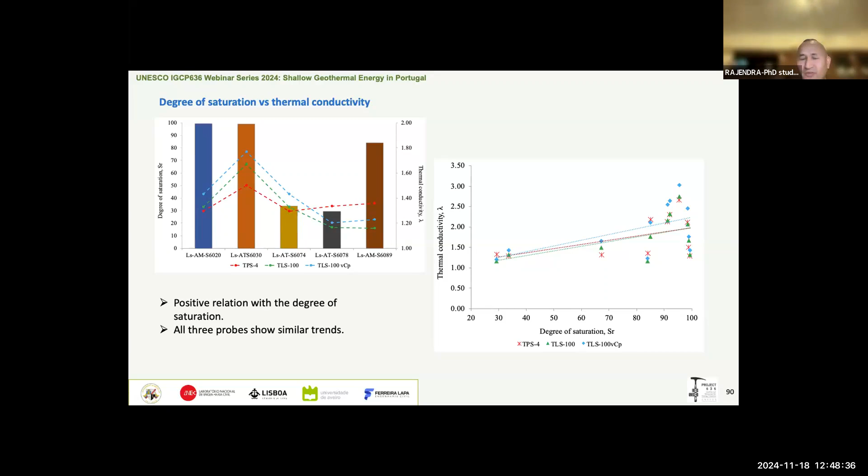Here we see void ratio versus thermal conductivity, and the general trend is that when void ratio increases, the thermal conductivity decreases, because of the low conductivity of air in the voids. On the left side, analyzing sample by sample, sample 6061 has a very high void ratio and low thermal conductivity.

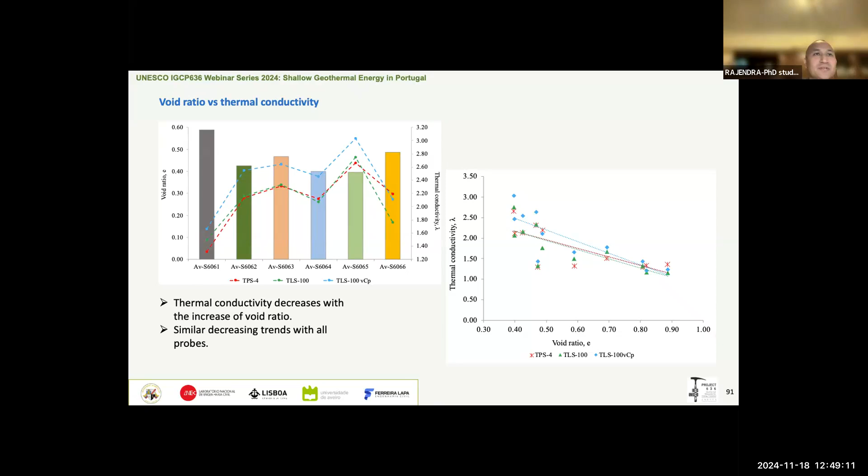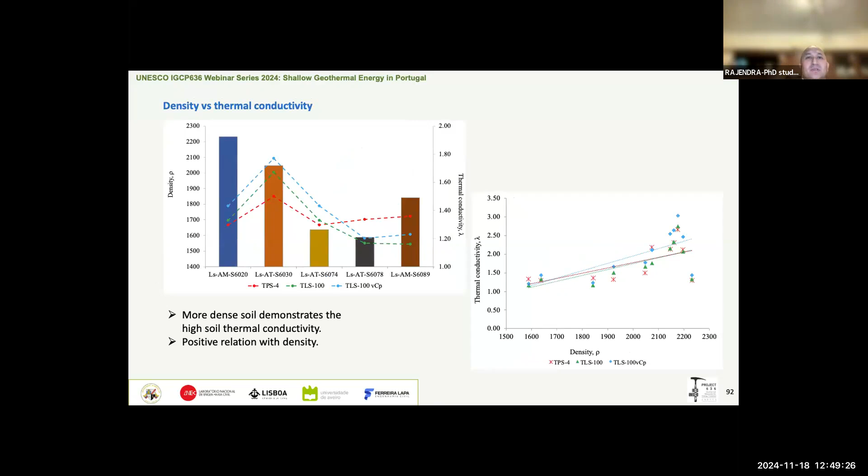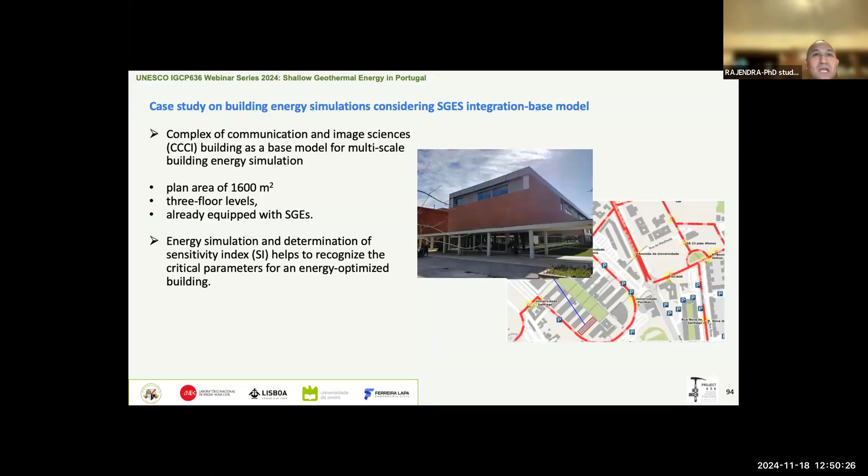Moving to the next objectives, I will go for the building energy simulation for the CCCI building. As I mentioned before, I will use it for calibration purposes, and I will go for the whole campus building simulation. For that purpose, I'll use the SketchUp model for 3D modeling, and I will import it into the CitySim Pro model for the whole building energy simulation.

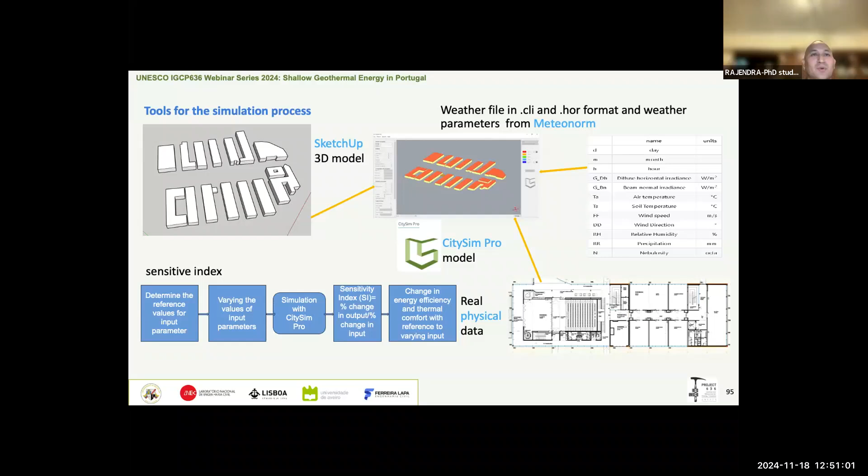For that purpose, I will adopt the climate data from the Meteonorm, and I will use the real physical data from the building and occupancy data, and simulate the whole buildings for the purpose of building energy efficiency. Later I'll go for the simulation of the ground source heat exchanger by utilizing the data obtained from the previous tasks, the real value obtained from the soil thermal conductivity test, and the energy demand from the building energy simulation. Then I'll use the GLHE Pro simulation software for the design and analysis of the ground heat exchangers.

In conclusion, soil thermal conductivity is an essential parameter for the estimation of the potential of shallow geothermal energy, and thermal conductivity is heavily dependent on different soil physical parameters and mineralogical contents, and is very site specific. We can see the variability in the lambda value, the thermal conductivity value, in the Aveiro and Lisbon soil, and all thermal probes show similar trends.

This research addresses the need for localized data on soil thermal properties to support sustainable energy infrastructure like shallow geothermal energy systems. Accurate and site-specific data on soil properties will be crucial for maximizing the efficiency of geothermal energy systems.

We use it in the plasterboard walls and ceilings. And we have a comparative study between two different rooms: the first one with the PCM in the walls and ceilings, and the second one without.

We observed that we can use this PCM stored energy to disconnect the system during the night, because it's a school building, and at night it's empty. So we disconnect the system during the night, and we use the 5 degrees Celsius of storage in the PCM, in the plasterboard walls and ceilings, to have more temperature in the morning when we connect the system again. We saw that these 5 degrees make all the difference, because we have a substantial gain in disconnecting the system.